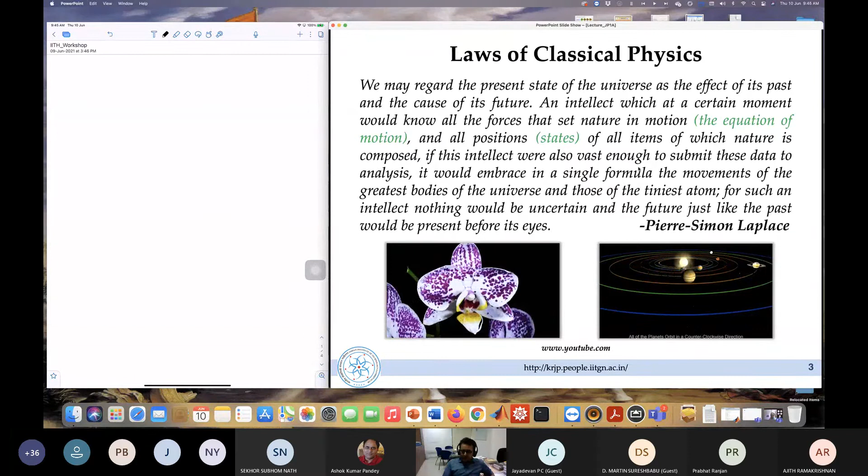So what is the basic governing law that we are thinking about? It is determinism. Or more often, it is usually called the conservation of information. So let's talk about flipping a coin. I think people would have played this for fun. Let's say that whenever I toss a coin, I do not know what would be the outcome of that particular experiment. The outcome would be probabilistic. But let's make it deterministic.

Let's say that whenever I flip a coin, if I start with head showing up, then I would come back to head itself. If you talk to a small kid in the playground, they have a notion that if they start with a head, they would come back to head. If they start with a tail, it would come back to a tail. Somebody might have told them, but that's obviously not the case. It is probabilistic. The probability would be 50%, which happens to be the case when you do infinitely many trials. But because we're talking about a deterministic system, I would say that I have a two-state system over here. The head is one state and the tail is the other state.

If I start with a head, I would come back to a head only. That's my dynamical law. Or let's say that's a kind of a gamed coin. Let's say that I have gamed my coin such that if I start with a head, I would always come back to a head. If you end up getting such a coin, obviously you would be winning all the time. Maybe it is somewhat similar to the movie Sholay, where he has a coin which has head on both sides. Whatever you do, you get a head.

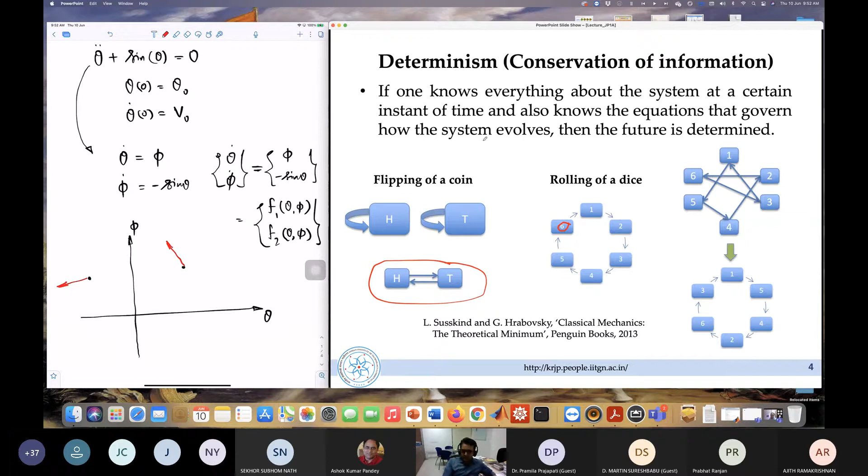Because obviously theta dot would tell me in the theta direction what would be my magnitude in that particular direction for evolution further. Similarly for phi dot also. So that's the idea of a vector field, and obviously the pendulum satisfies this determinism condition. There is another notion, obviously from that particular statement, what is called reversibility. So what do I mean by reversible? Obviously, I'm talking about a solution.

So whenever I write a solution, theta of t, I never restrict my time to be positive. I do not have to restrict my time to be positive. Why should it be restrictive? Whenever I talk about a dynamical system, I should be able to go back in time also. Let's say t0 plus 10 is what I would want to see. t0 happens to be 0 for me in this particular case.

Similarly, I should be able to find out what is t0 minus 10 also. t0 happens to be my initial time instant at which I have provided my initial condition. So I should be able to go forward and backward in time. That's the concept of going back in time: what is called reversibility. Our dynamical law should in fact be reversible also.

Let's consider a simple dynamical rule for a three-state system. Let's say someone has created a three-faced dice. I start with 1, I go to 2. At 2, I would go to 3. And from 3, I go to 2. In forward direction, I know where I'm going. No issues with that. This is deterministic. But is it reversible?

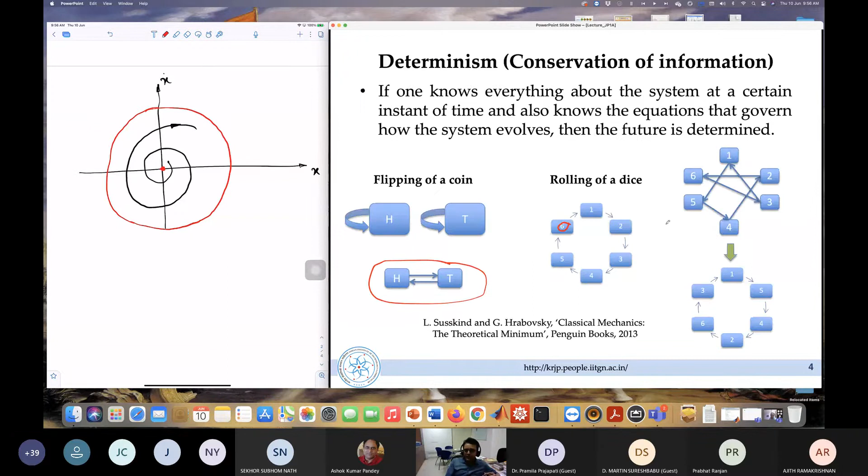That's against the law of classical physics that we spoke about. There is loss of information. Information conservation doesn't happen, so that cannot happen.

Now, where is the reversibility failing here? If I start at point 2, I have two states I can reach, 1 and 3. But if I start at 3, I know where I will be going, and I also know where I came from. But at certain states, I will never be able to know where to go further. So there is loss of reversibility in this particular sense.

So our dynamical law should be both deterministic and reversible. That's the reason if you have taken a formal course on nonlinear oscillations, we would always start with the premise of the existence of a solution and the uniqueness of a solution.

So obviously you would have spoken about Lipschitz continuity, or let's say the differentiability, or the continuity of your vector field correspondingly. Lipschitz continuity is in fact a bit more relaxed form of general differentiability of your vector field in that particular sense. Lipschitz continuity is taken in a bit different context, and it's a bit more relaxed condition that you can impose. Okay.

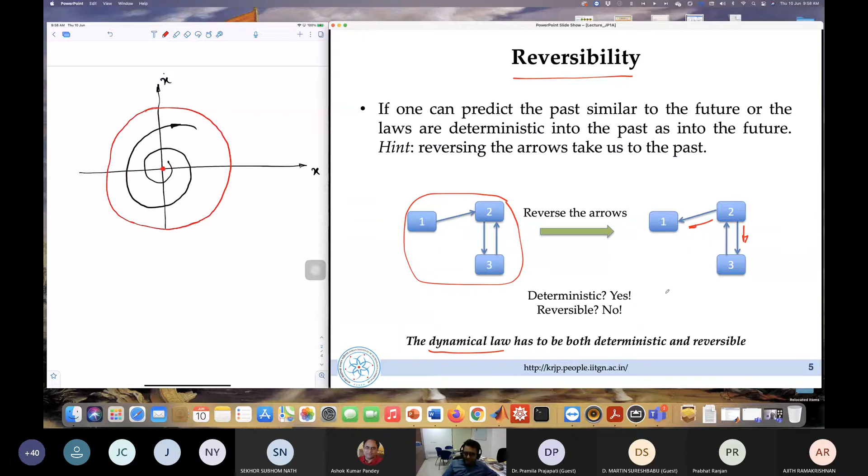So this is reversibility as such. So both deterministic and reversible. And there are certain conservation laws we would talk about. We will come to this also in a general vector field. Very quickly we will go through this. So if your system reaches only very few states, let's say I have a dice here with 6 numbered faces, and whenever I start with 1, it can reach only 2 and 6.

Or let's say if I start with 2, each of these is deterministic and reversible also. There is no loss of reversibility or determinism. But if I start at 1, I can never reach 4. And 1, 2, 6, if I start with any one of them, I can't reach 3, 4, and 5. Okay, which means there are certain states that the dice can reach when you start with either of these things.

Okay, so it forms one loop over here that would end up getting a certain measure, what is called the conservation law. There would be a certain measure for that we would talk about later. So you would be able to reach only very few states, and that's what is called the conservation, right? There is a certain quantity that would be conserved. So you will never be able to reach every state of your dynamical system.

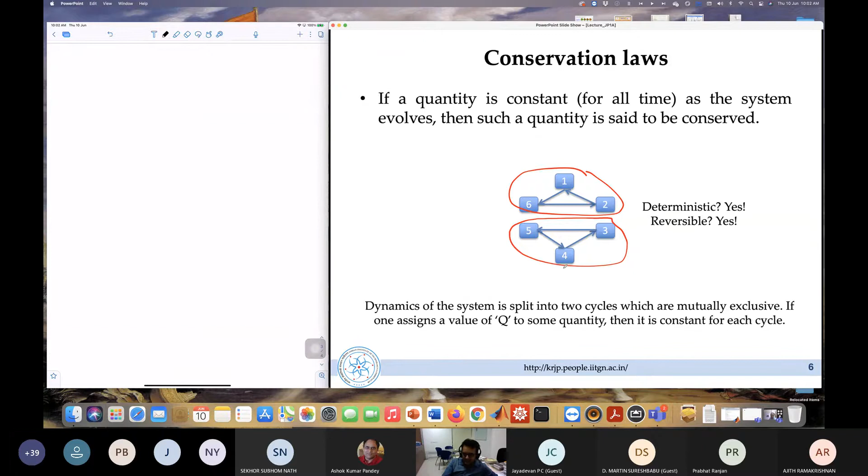Okay. Now, coming to the dynamical systems itself, there are different sources of nonlinearity. Obviously, there is no system which is completely linear. So linearization is an idealization, the luxury that we have got for a certain set of systems. So where can these nonlinearities come into picture? It can be in the form of nonlinear stress-strain relations. Whenever you do tensile testing, you would get a certain region which is linear in the initial stage. Then it becomes nonlinear, obviously, right?

And most of the systems that we talk about or look into would be evolving within this particular region where it is linear. But that's not obviously the case every time; nonlinear stress-strain relations can come into the picture because of, let's say, nonlinear elastic materials. There can be polymeric materials which show nonlinearities. So stick-slip, piecewise linear springs, all these are nonlinear in nature.

And there are geometric nonlinearities which are because of large deformation. This is a very simple case that you are seeing here. Once again, the post-buckling analysis that I think CP was talking about the other day happens to be a geometric nonlinear problem in that sense, because you do have large deformation there. Till the point it buckles, obviously we will talk about linear, and I'll show the bifurcation in a later lecture. That obviously leads to large deformation, which is happening here.

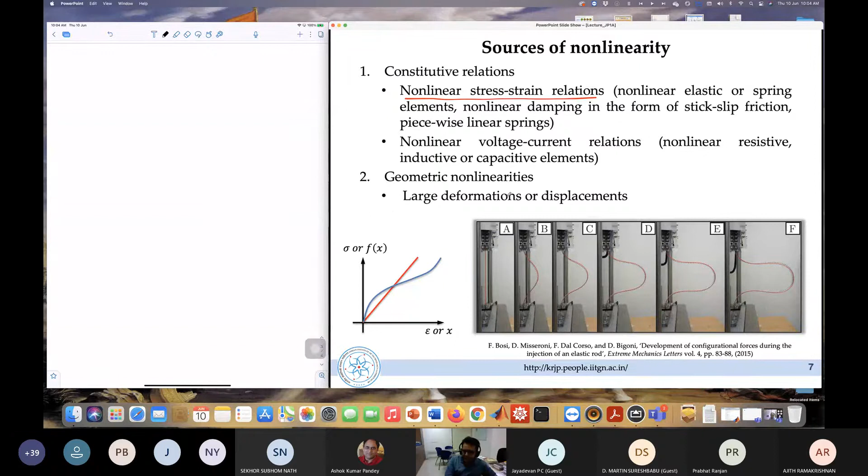And obviously boundary conditions. Free surfaces and fluids lead to nonlinear boundary conditions or deformation-dependent constraints. Let's say I have a beam, not your regular cantilever beam, but I have a certain region which it is conforming to as it deforms. So my boundary condition is changing as it deforms, right?

So at a certain point here, the beam would look something like this, right? Over here, the other region would just be resting on my region here. I'm just drawing it a bit crudely. So it would be tangential at that particular point. So those boundary conditions would be deformation dependent and lead to nonlinearities.

And what others? Bilinear springs. If you have a stop, at this particular point there is a change in stiffness. After delta x goes beyond delta, I have k1 plus k2. Before that, it is k1. You can say that this is linear in two pieces. So two pieces of linear systems are juxtaposed together, and at that point I would be able to match my conditions. But still it is essentially a nonlinear system.

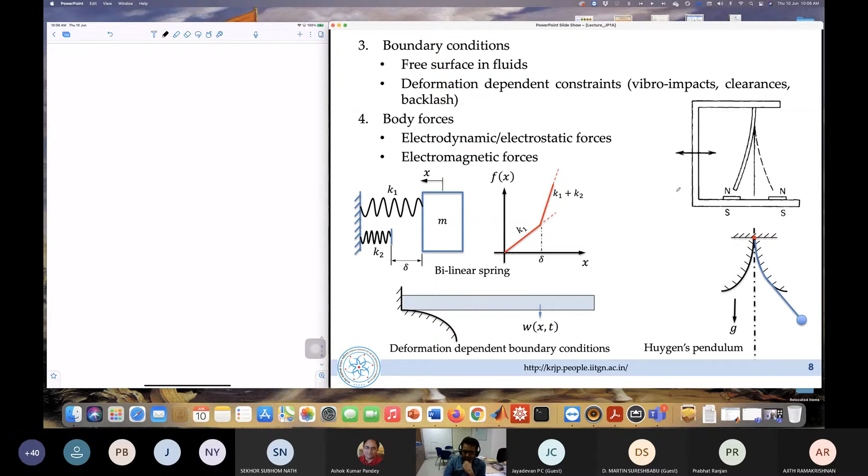We will see that. Once again, electrodynamic forces, electromagnetic forces, most of them happen to be nonlinear in nature, but obviously all the analysis that we end up doing happens to be linearized dynamics. So when we talk about essentially nonlinear systems, there are very few that we can think about. We will see how it works. So let me just show this animation here.

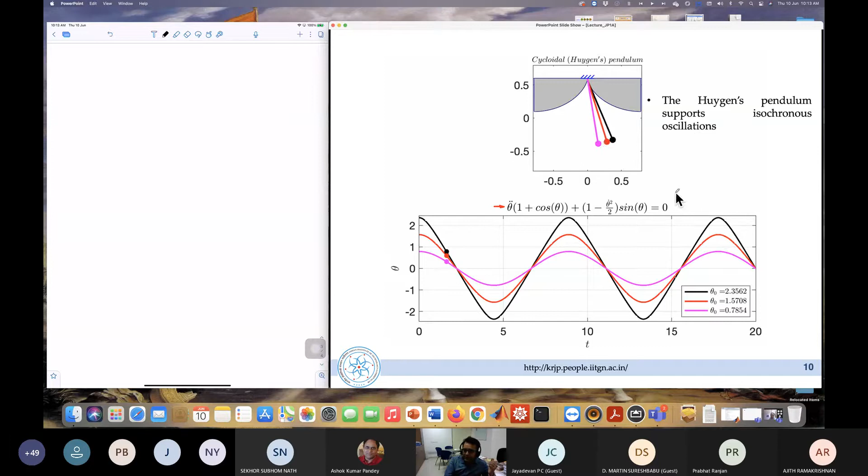There are several mechanical systems which can be made isochronous. You can look into some of the papers by Richard Rand. He works out ways in which, by adding certain nonlinearities, you can remove the amplitude dependence. So that can in fact be done. So don't ever think that every nonlinear system would have a frequency which is amplitude dependent. You can't generalize that as a statement. But most nonlinear systems that we talk about do show this. If you can find that particular relation, well and good. If you can't, this is a very classical example of a nonlinear system with isochronous oscillations. Okay.

So now, as I said, we need to understand different kinds of nonlinearities, or let's say different classifications of nonlinearity, because most of the methodologies that we talk about in this particular lecture or maybe in your courses happen to be relevant to very specific classes of nonlinear systems.

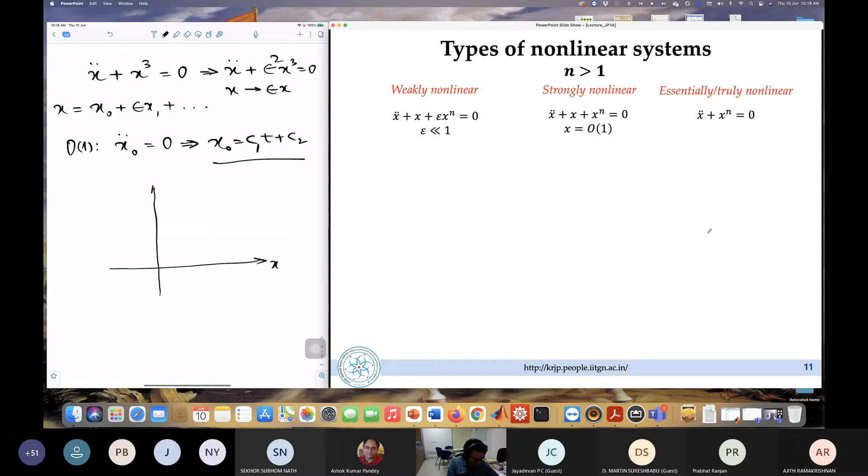But as I said, very clearly, I know that this has periodic solutions. We can easily prove that. Why? Just because if you write its potential energy, so this is x, V of x. What would be its potential? This would look something like this: x power 4 divided by 4. Because your restoring force happens to be minus dV/dx, right? Because it's a 1 degree of freedom system and I do have a 2-dimensional state space as well.

So what I do end up getting is x power 4 by 4, which happens to have a certain flat bottom. Okay, so it has a certain flat bottom also. I couldn't write it that way, but you can easily see that this has oscillatory solutions. But if you blindly use your asymptotic method, it would tell you that it has no oscillatory solution. So the basic idea is whenever you talk about asymptotic method, it needs to have a linear structure which gives you the solution that you are in fact interested in.

Okay, so x0 = c1t + c2, it happens to be uniform motion that we are talking about. All right, so the acceleration is in fact equal to 0. It has uniform velocity starting with certain initial displacement. So you need to be careful about when you can use asymptotic methods.

Strongly nonlinear systems, you need to be aware till what region this asymptotic method is valid. Weakly nonlinear system, you can blindly use it, no big issue, because you do have a parameter which is sufficiently small, which you have recognized in your system. Essentially nonlinear system, asymptotic methods don't work. Okay, what works? A harmonic balance method does work in that particular case, but obviously it has its own limitations. Let's not worry about that right now.

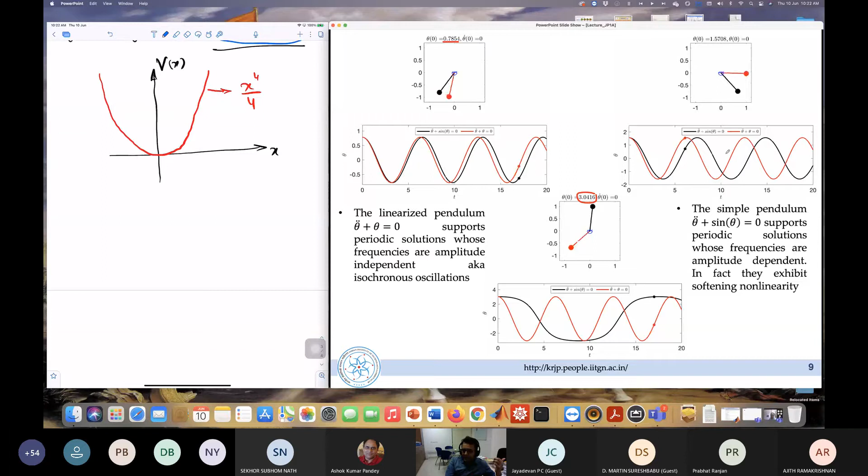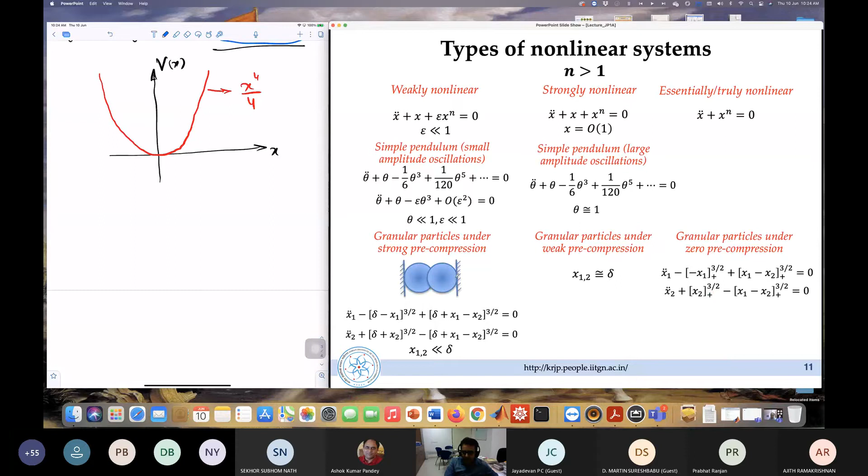Let me just show what is really happening over here. Let me just write it over here. So these are two particles which are interacting with the wall. So let's say this is x1, this is x2. So this is the interaction that I'm talking about, x2 power 3/2 with a plus.

Whenever x2 is positive, I do have a restoring force, or let's say the elastic force acting on that particular particle. But whenever x2 becomes negative, obviously it loses contact with the wall. So there is a loss of interaction force at that particular location, so it becomes in fact equal to 0. So this would be the basic classification that you can think about.

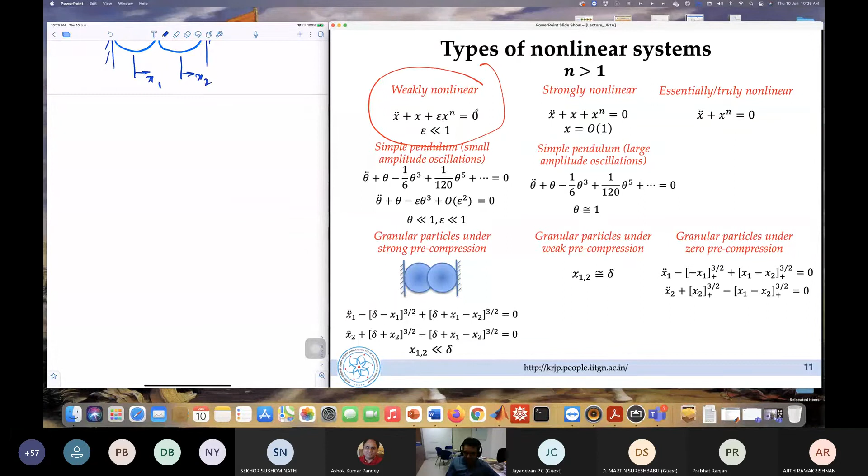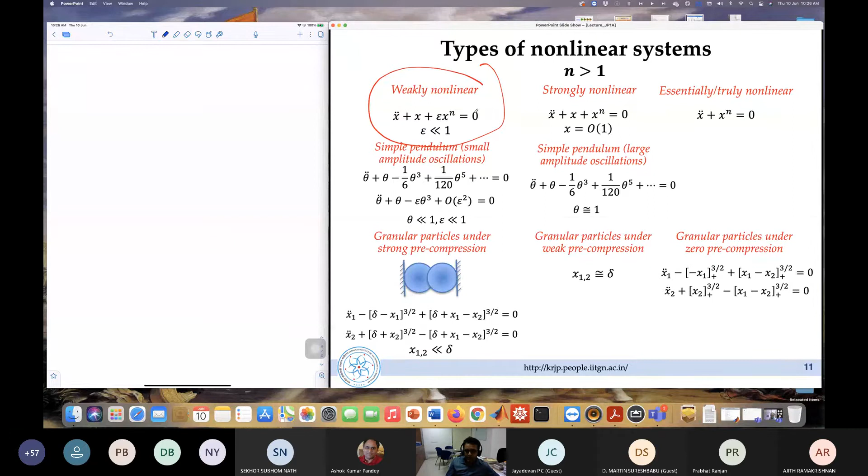Obviously, there can be several other ideas that you can classify nonlinear systems into, but basically this would be the framework. And most of the methods that we talk about today happen to be applicable to weakly nonlinear systems. Multi-time scales is a more general idea, because when we talk about discrete systems, we talk about multiple time scales. But when we talk about wave propagation theory, even spatial scales can be spoken about. We will use that later when we talk about the Sine-Gordon equation.

Now, coming back to dynamical systems, you already know I can write it in the form of a vector field. I'm not using the curly brackets here, maybe because of sloppiness, or I'm already writing it as x belongs to Rn, where R is the real space and n is the dimension of the dynamical system, or the state space. So x is a vector of n different values, and F is once again a vector, F1 to Fn correspondingly.

So the rule that I'm looking into takes Rn values, that is x1 to xn, and it would give me a number in the n-dimensional space once again. So F is the total vector field that I'm looking into. Whenever it is not explicitly dependent on time, I call this an autonomous dynamical system. Whenever I do have an explicit time dependence, I call this a non-autonomous dynamical system.

A very simple transformation of a non-autonomous dynamical system to an autonomous dynamical system can be performed. Where time is the variable, I will define yn+1 dot equal to 1. When I do a simple integration, that becomes yn+1 equal to t. So I would be able to convert my non-autonomous dynamical system to an autonomous one. A very simple trick. Why do I need it? I don't think it would be all that necessary in most cases.

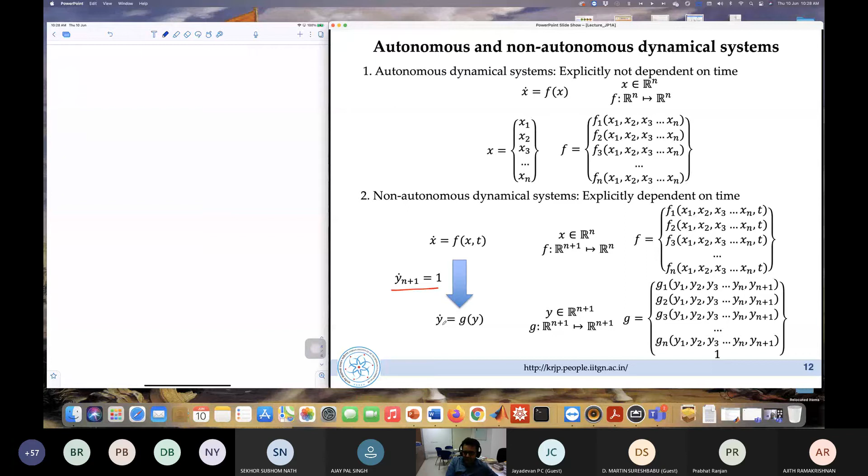As I said, it's a simple vector field. What do I mean by a vector field? Let's say it is a two-dimensional state space that I'm talking about. If I pick any point over here, it would tell me in what direction I would be evolving.

So the dynamical system or dynamical law that evolves it is f of x. So f of x would tell me in what direction I would be going further. This is something that is already known to us. So let's make things a bit more abstract because we will go to some other aspects later.

So let's say that I do have a non-autonomous dynamical system with a certain initial condition. Because obviously, when we talk about the state space, it is not a finite space. It's an infinite space, right? And how many states are there? Infinitely many states would be there because it's a real space that we are in fact talking about.

Of that real space, I'm interested in a very specific set of initial conditions, or a subset of that particular higher dimensional space, which I would want to see how it evolves. Let me just consider a three-dimensional state space. Why just three-dimensional? Because physically, I will be able to draw only 3 dimensions. Visualization would be easy.

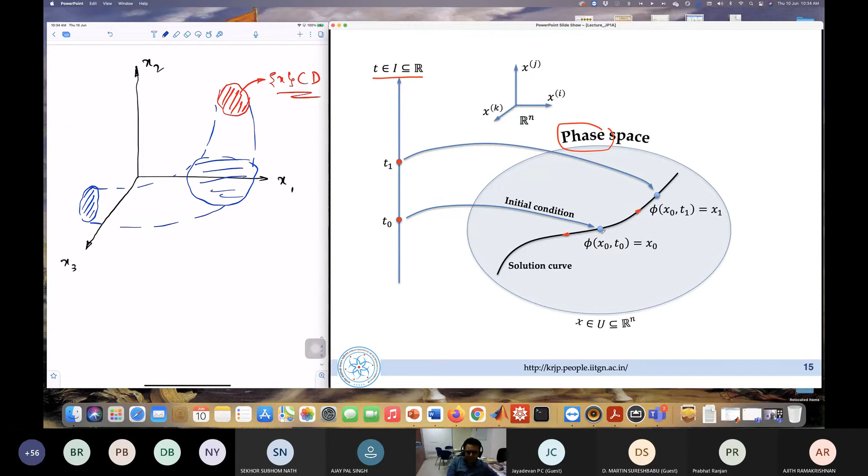So you're looking at only a finite number of states in that particular sense. But here we call it a flow because time happens to be a real number for us.

Of all these regions, I'm looking at a subset which are invariant. What do I mean by invariant? Let's say that I do consider something called an equilibrium point. In that particular case, I know what is an equilibrium point, right? I believe you are aware of that. So the point in state space which doesn't evolve in time. If you start at that as an initial condition, it would never evolve from that particular position. Those are what are called equilibrium points or fixed points or stationary points.

Then what is the second kind of invariants that I'm looking into? What are called periodic solutions. So what is a periodic solution? If you start at a certain time instant, it would come back to the same position after a finite time duration. Whenever I say x of t, it happens to have all the n variables, n tuples to be more precise. All these n values should come back to the same position.

So let me just put it this way: x1 of t, x2 of t, so on and so forth, xn of t is equal to x1 of t plus capital T, x2 of t plus capital T, xn of t plus capital T. So this is what is called a periodic solution. Once again we'll talk about equilibrium points, periodic solutions, so on.

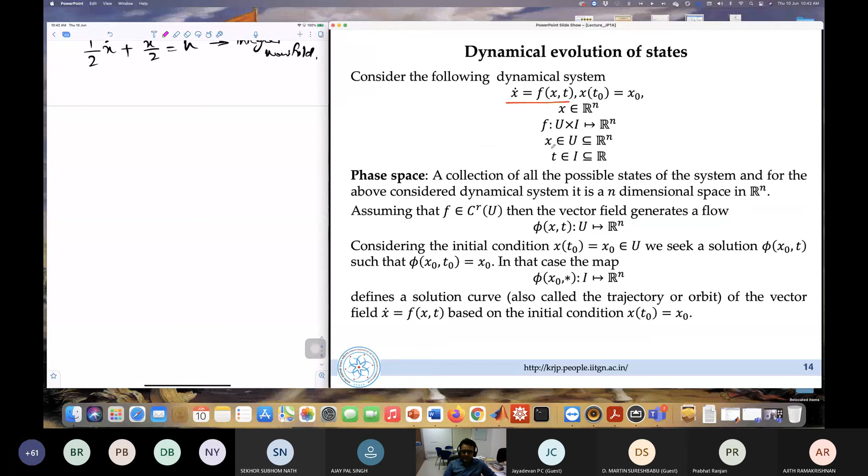So if you just equate your vector field to 0, that would tell you that you do not want to evolve anywhere. If you go back to this picture, my vector field is showing me a direction and a certain magnitude also. It is not just the direction, it is also telling me the magnitude. If the rate of my increase or decrease, or evolution rate, is made equal to 0, obviously it would have to stay there. It can't evolve in any direction.

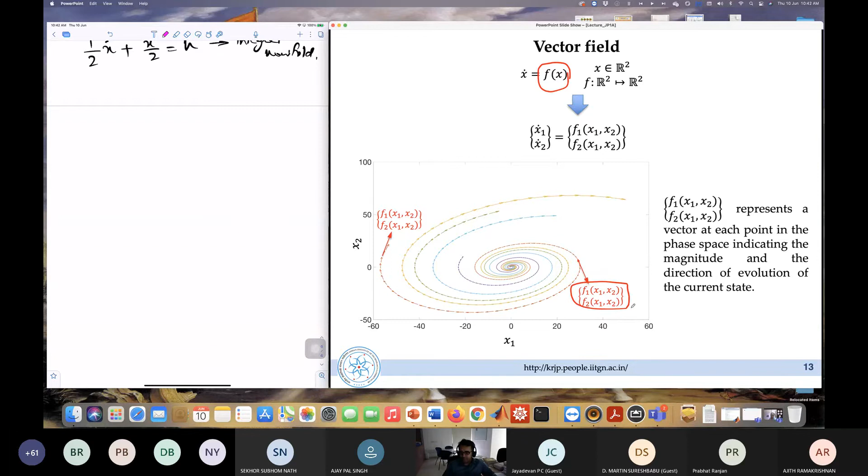It has to be made equal to 0 in every one of the f's over here: F1 equal to 0, F2 equal to 0, Fn equal to 0 in total. Not that F1 to Fn minus 1 is 0 and Fn can evolve. No, that cannot happen. So making this vector field equal to 0, you would get an equilibrium position in state space. In mechanical systems, the equilibrium position would always be on the horizontal axis, or rather it will not have any velocity, so it would be on the axis of the configuration space.

Let me just clarify what is a configuration space, because it's your mechanical system we are talking about. Let's say that I have a 2 degree of freedom system, which we will talk about a bit later as a nonlinear system. So what is config space here? Configuration space is 2-dimensional, which is x1, x2. What is state space? x1, x1 dot, x2, x2 dot. The notation can be a bit different; I think CP was using a different notation. It doesn't really matter. x1, x2 are generalized coordinates. When you combine their generalized velocities with them, we call it the state space.

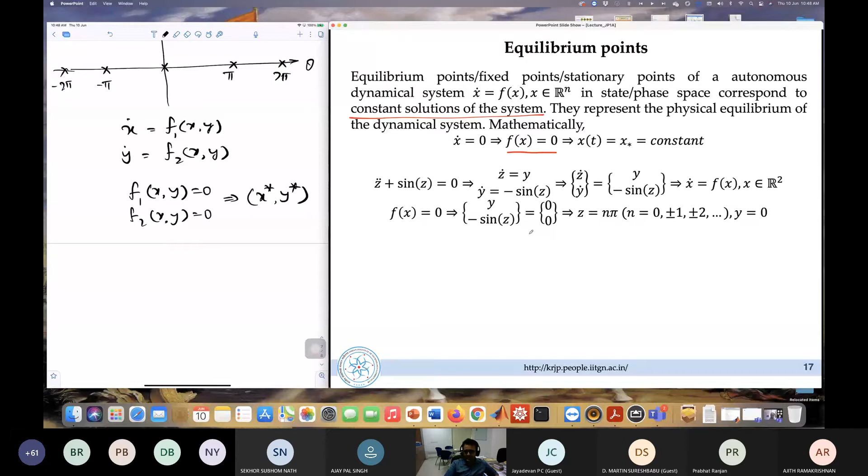It need not always be on the horizontal axis. I have seen students thinking that the equilibrium point should always be on the horizontal axis. That's obviously not the case for a general dynamical system. For a mechanical system, yes, it should be on the horizontal axis, or in the configuration space, to be more precise. Okay, so this is a simple case. I think you'd be able to easily derive this equation of motion.

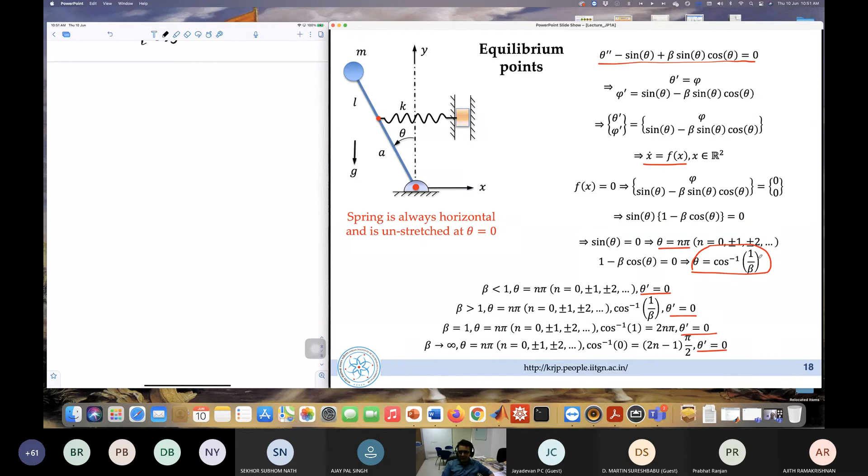Now, so that was the equilibrium points for an autonomous dynamical system. Okay, can we do something very similar to a non-autonomous dynamical system? Let me just take a minute to in fact look into this particular case. Let me just consider a non-autonomous dynamical system of this particular form, right? Can I just equate it to 0 to find equilibrium points? Let me just write it down here once again. X dot equal to minus x plus t is my quantity. Let me just call this as f of x comma t.

For equilibrium, let's set f of x comma t equal to 0, which implies minus x plus t is in fact equal to 0, x equal to t. Happy, fine. So you will say that my equilibrium point is in fact x equal to t, but that doesn't make any sense whatsoever, right? Why? Just because x keeps on changing with time, but you wanted your fixed point to be in fact fixed in time, no evolution whatsoever.

If this keeps on changing with time, the green curve is what you are getting when you just plot it. But if you just solve this equation, just a very interesting prospect, because it's a first order differential equation, easily you will be able to solve. What you end up getting is this as the solution. And just notice that as t tends to infinity, the value of x goes to this particular value t minus 1. It asymptotically reaches that particular value, which is the red curve over here.

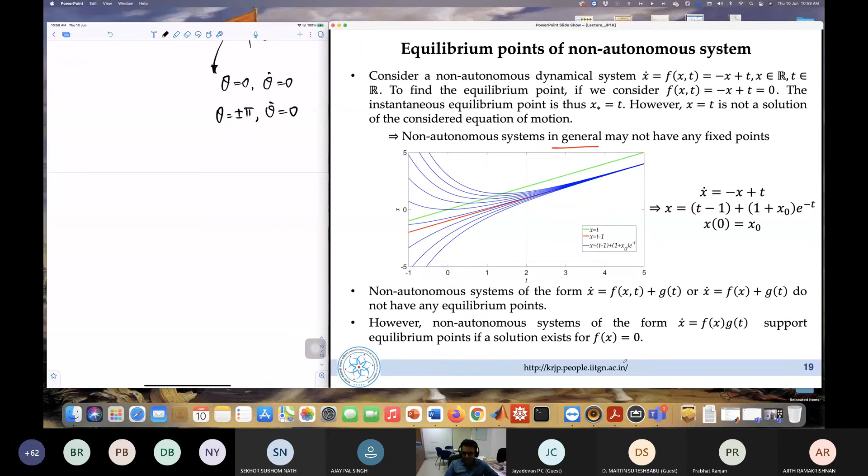Now, coming to the question of stability, there are different notions of stability that we can think about. To begin with, we'll talk about stability of equilibrium points. Maybe then we can go to stability of periodic solutions later. One of the notions of stability is what is called Lyapunov stability. We start with a very general scenario; I will not go through the nitty-gritty details.

So what is really happening in a higher dimensional space, or a two-dimensional space to be more precise? Let's say that I have x and x dot. I have an equilibrium point over here. So what it is stating is, give me a value of epsilon. Let's say this is epsilon. If you give me a value of epsilon, I will be able to find a certain value of delta.

So a certain value of delta such that if you start inside this particular delta, it would stay inside this epsilon. It would never go out of that particular epsilon. That's the basic idea. So I need to be given a certain value of epsilon. I will be able to find a value of delta such that it would never go out of that particular outer circle, which is in fact the epsilon circle. That's a very simple idea in that particular sense.

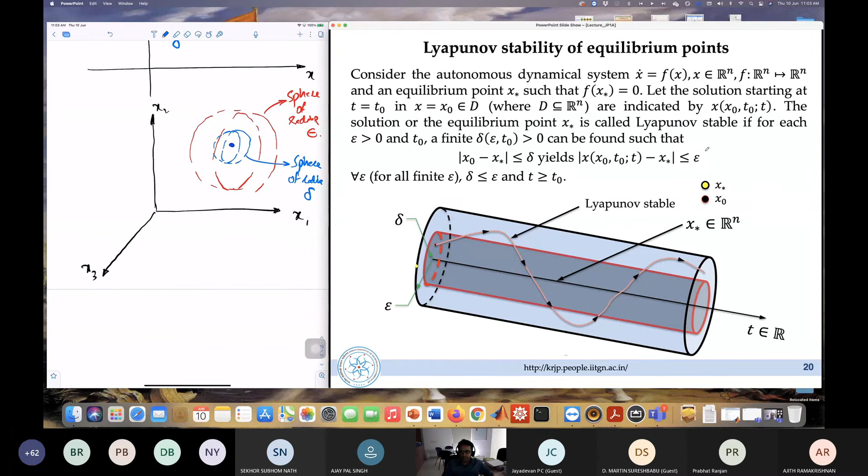So this is quite simple. I'm just giving you an overview of what it is, so that we will be able to use some basic ideas later. I'm assuming that these are mathematical definitions which you are already aware of. I'm not spending time on that. I'm just giving you a general overview of this particular case.

This is Lyapunov. I usually do something a bit different, that I always take a snippet of some of these people who we are talking about. I think we'll see more names and pictures coming out. Just to at least appreciate the kind of work that they have done, we just keep using their work without even acknowledging them. So that's the reason I put up a slide just talking about very basic things about their contribution. Lyapunov stability is what we know of. Lyapunov functions, I think you will be able to see later. You might have used it also in this particular sense.

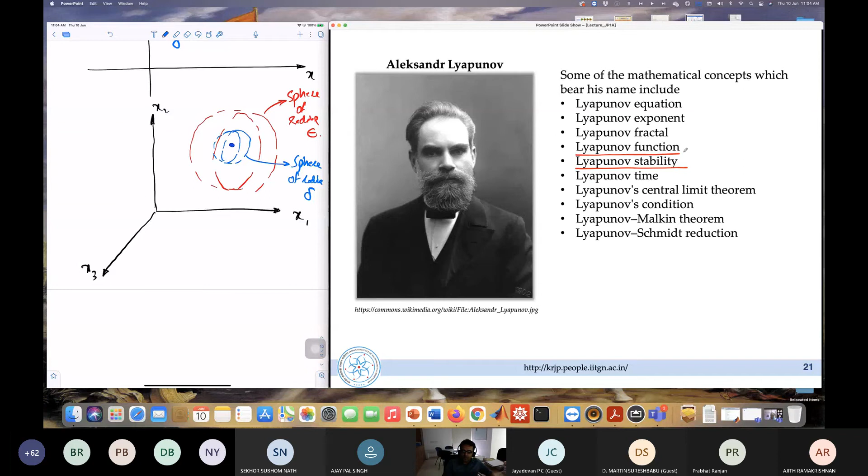Now, a more restrictive definition is what is called the asymptotic stability. So it's a more restrictive, let's say, condition, or let's say the notion of stability in that particular sense.

So sorry for my movement, if you're seeing my video, because I have a motion sensor in my office. And if I stay in one place, equilibrate at one place, the lights would go off. Sorry, I just need to keep oscillating, actually.

So a more restrictive notion of stability is what is called the asymptotic stability. Once again, we'll start with the same idea. Just give me a certain epsilon over here, and you start somewhere inside. Let's say you give a certain delta over here, right? So delta is what has been provided to us, and I start with an initial condition within this delta. As time evolves, the evolution has to in fact converge on to the equilibrium position itself. There is no need of an epsilon circle here. I have just written it this way to show the difference between the asymptotic stability and Lyapunov stability.

If this is my equilibrium position, I do have a delta circle, radius delta. I start with a certain initial condition close to somewhere here. It would just converge on to the equilibrium position itself, or let's say the equilibrium point. So that happens to be what is called the asymptotic stability.

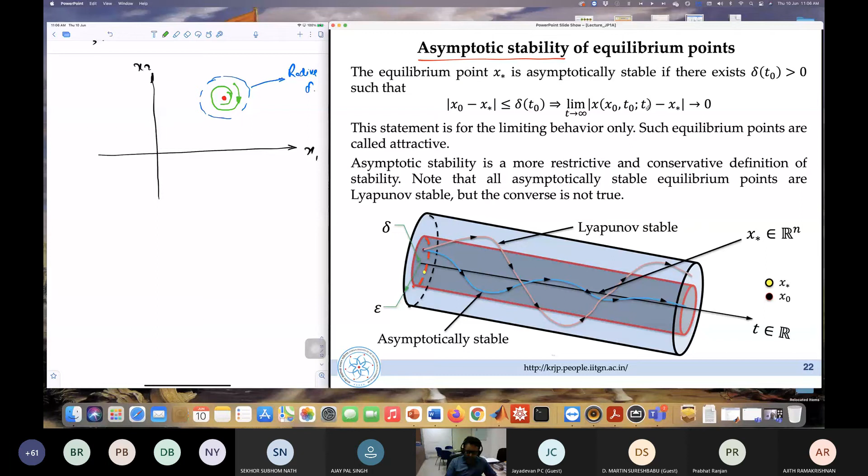These are two different notions that we come across and talk about quite commonly. Let me start with a very simple case. This is a simple damped oscillator. Depending on the value of K, M, and because all of them are positive quantities, I will not make it too complicated here. All of them are positive quantities as such.

So whenever I do have C equal to 0, I do have an equilibrium point which is in fact Lyapunov stable. Why do I call it Lyapunov stable? Because in this particular case, if you see here, this is x and x dot. So I do have only one equilibrium point. If I give a value of delta and I start with any initial condition here, it would just stay here. It's a periodic oscillation, right?

If I change my initial condition, something like this. So I think I shouldn't have written this delta here; that was a mistake. I should have written my delta much larger. So the epsilon would be much larger than delta. I start within this delta radius, I would stay there forever. It doesn't matter, right? That is in fact what is called the Lyapunov stable equilibrium position, for C equal to 0.

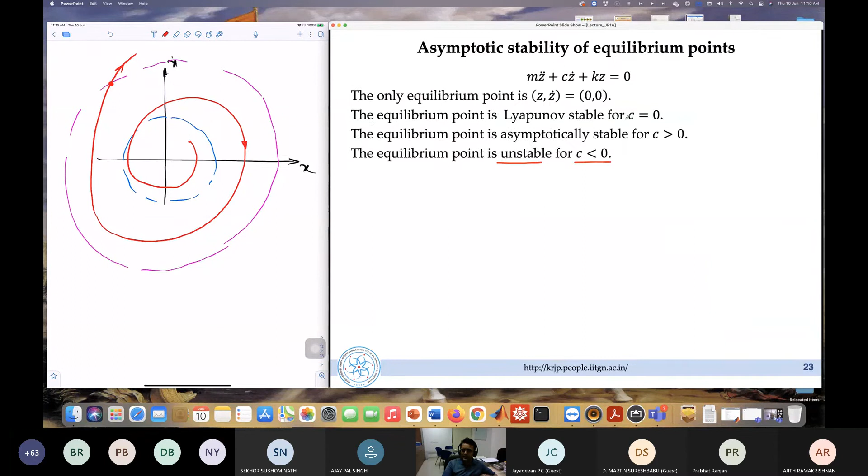So now you can say I'll make epsilon much larger. Whatever large value of epsilon you impose, it would just breach at a certain time instant later. So that's the reason it would be an unstable equilibrium point. Just note that this notion of asymptotic stability is the limiting behavior, not for finite time durations. So t tending to infinity is what we are talking about. Asymptotically it would converge onto the equilibrium point.

But once again, note that it will never be able to reach the equilibrium point itself. If it reaches the equilibrium point, you would have loss of information, loss of determinism, whatever we spoke about earlier. So as time tends to infinity it would approach the equilibrium point, and you will never actually reach it. That's the basic idea. Now, the linearization is something you have already done. I think CP spoke about the Jacobian matrix and so on, so I'll not speak about these again.

We start with a certain equilibrium position, x star. When I say x star, it is in fact x1 star, x2 star, x3 star, up to xn star. That is a point in your n-dimensional state space. It's not a scalar value, it's an n-tuple, a point in that n-dimensional state space. There are n of these values. Obviously, you are aware of that.